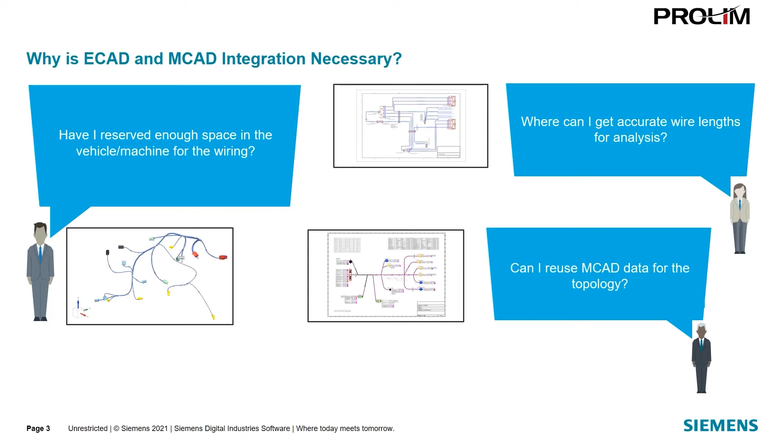The electrical designers need to ensure the correct circuit behavior, which requires voltage drop analysis and fuse sizing calculations, that is dependent on real-world wire lengths. How can these wire lengths be obtained? The harness designer needs to reproduce the 3D harness topology in 2D and combine it with the electrical data. If the 2D harness is just a derivative of the 3D harness, why should it need to be recreated from scratch? With the MCAD integration supported by VeSys, we address these challenges.

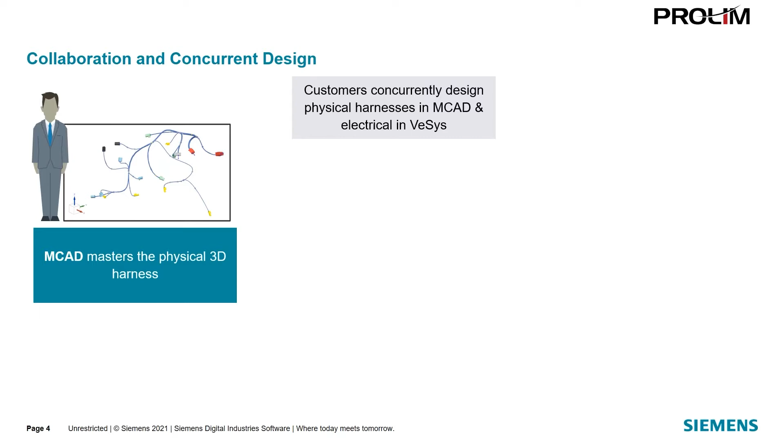A design flow incorporating VeSys supports collaboration and concurrent design. Customers are able to design physical harnesses in their MCAD tool of choice, while the electrical and harness designs are done within VeSys. The mechanical designer defines the harness geometry and fixtures, along with reserving space in the vehicle or machine. The electrical designer, using VeSys Design, masters the electrical content for the system, creating the needed wiring diagrams and conducting analysis.

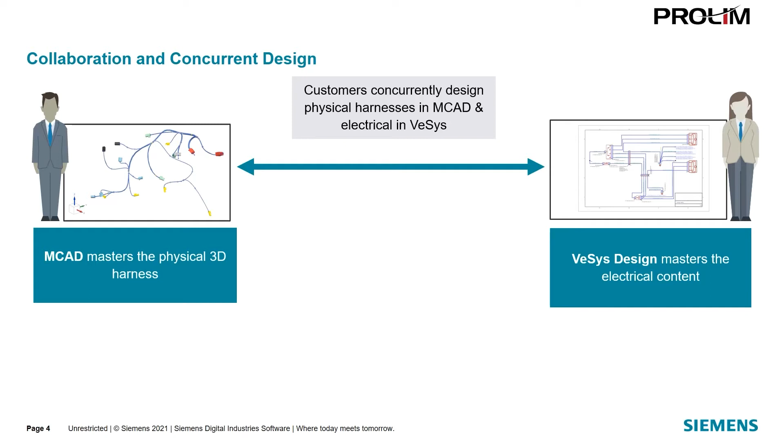Here, the mechanical and electrical disciplines can work independent of each other, but can easily pass data back and forth as it becomes available. The harness designer, using VeSys Harness, combines the MCAD and electrical data to fully define the electromechanical harness product. These interactions enhance the visibility between the ECAD and MCAD domains, supporting the co-design of mechatronic products. Having a better understanding of the impact electrical and mechanical specific decisions may have on the other domain is critical to the overall design quality.

In addition, the data exchange supported by VeSys eliminates the need to manually transfer data between the tools, saving considerable design time and potential for manually induced errors. We will be going more in-depth on these exchanges during the demo. All of the integration capabilities are enabled via a combination of our bridges framework and adapters, which handle the exchange of information between MCAD tools and VeSys, and our plugins, which are developed using the MCAD application's APIs and deployed within the MCAD products. In return, this ensures a seamless integration of the data between the tools.

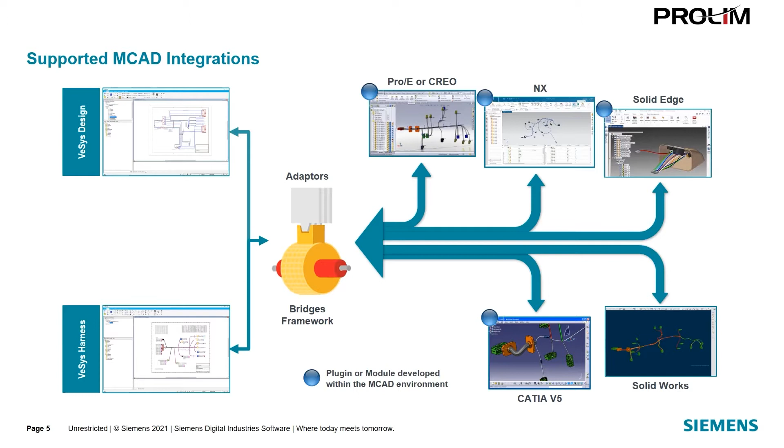VeSys supports integration with Creo, NX, Solid Edge, SolidWorks, and CATIA V5. VeSys and SolidWorks can exchange files natively, while plugins are available for the other MCAD solutions to manage the import of VeSys data. The Siemens tools, NX and Solid Edge, support a unique capability called Connected Mode. The NX and Solid Edge Connected Mode data exchange enables real-time data import and export, as well as cross-highlighting for ease of use and analysis during wiring and harness design.

The functionality automatically switches between wiring mode and harness mode exchange as needed within the same application. Any selected objects in NX or Solid Edge will be cross-highlighted in your diagram, and vice versa. For example, selecting a wire in VeSys will cross-highlight the corresponding shortest route path and the devices in NX that the wire connects to. Available objects include connectors, devices, wire bundles, splices, wires, multicores, clips, grommets, and so on. For the following demo, we will be utilizing Connected Mode to handle the exchange of data between VeSys and NX.

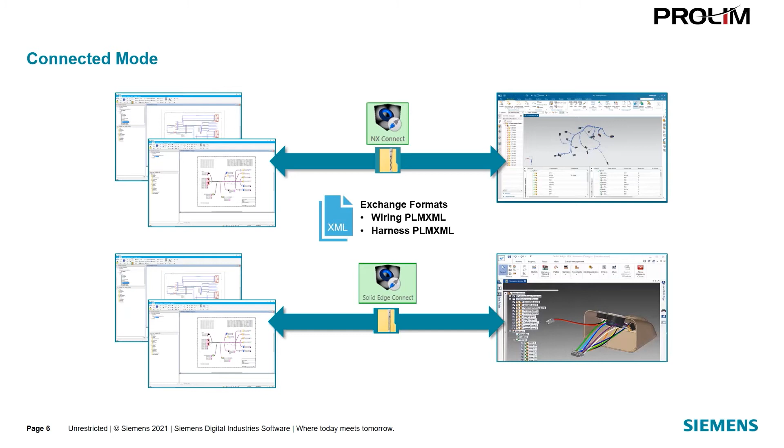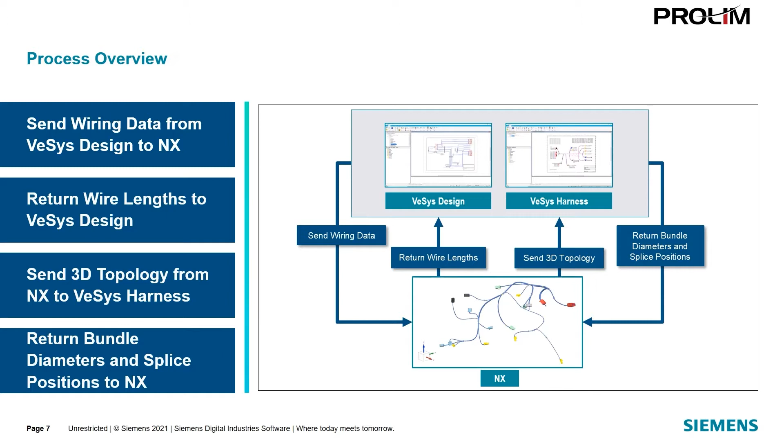Now we will be covering the various ways in which VeSys can integrate with an MCAD design. For this specific demo, we will be using NX for our MCAD environment, and will cover the bidirectional transfer of data between VeSys Design, VeSys Harness, and NX. In the first half of the demo, we will focus on the exchange between our wiring data in VeSys Design and physical harness data in NX. The wiring information from VeSys will be bridged out to NX as a wiring PLM XML file, utilizing connected mode. Once the data has been exported to NX, connectors will be auto-assigned and wires will be auto-routed.

Here we have the MCAD design open in NX and wiring design open in VeSys. As can be seen in the electrical connection and electrical component navigator of NX, there is no electrical content, only the bundles and connectors that have been added by the mechanical designer. Connected mode is established between both tools with the push of a button, enabling the real-time import and export of the wiring PLM XML file. The bridge filter allows us to select which harness designs we are exporting to. In this case, we will be using the single driver side door design.

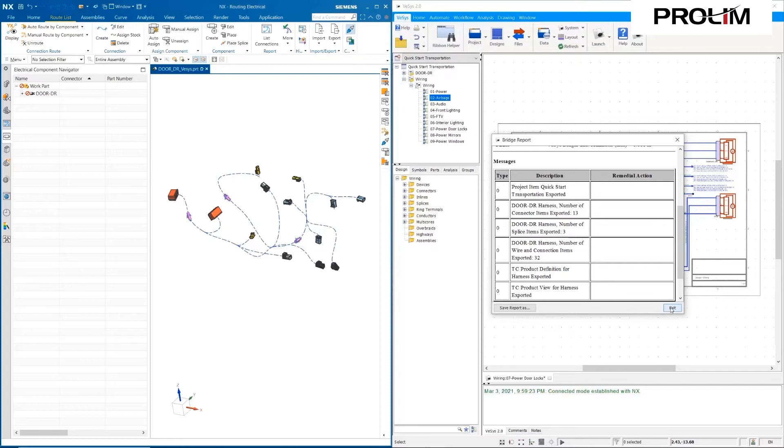The report indicates the number of connectors, splices, and wires passed to NX. The electrical component and electrical connection navigators are now populated with the data from VeSys. We will auto-assign connectors by part number, but it's possible to make the assignment based on any attribute. We will then manually assign any remaining components, in this case, the 3 splices.

Then, finally, we will also auto-route our wires at the component level. We successfully passed the electrical data from VeSys to NX with the push of a button, facilitated by connected mode. The mechanical designer had all the necessary data required to auto-assign connector part numbers as well as auto-route wires.

This saves the mechanical designer a considerable amount of time, avoiding the error-prone task of doing it manually, and also helps ensure the connectivity is an accurate representation of our VeSys-created wiring diagram. Now that the wires have been routed in NX, they have accurate lengths according to the physical routing. This is valuable information for electrical designers who can utilize it to conduct additional analysis and further verify electrical behavior.

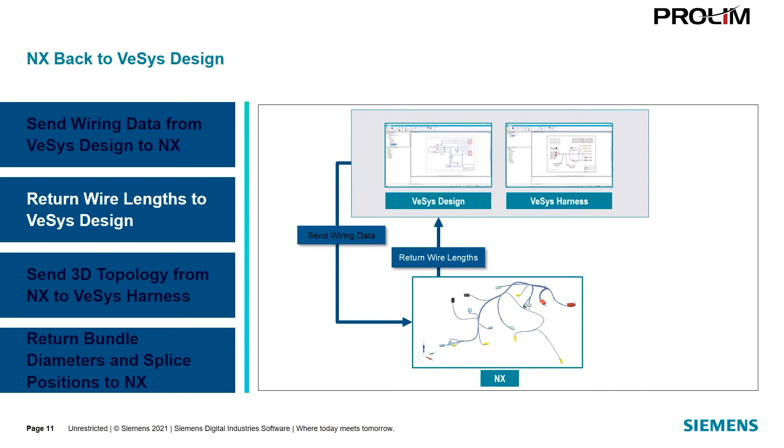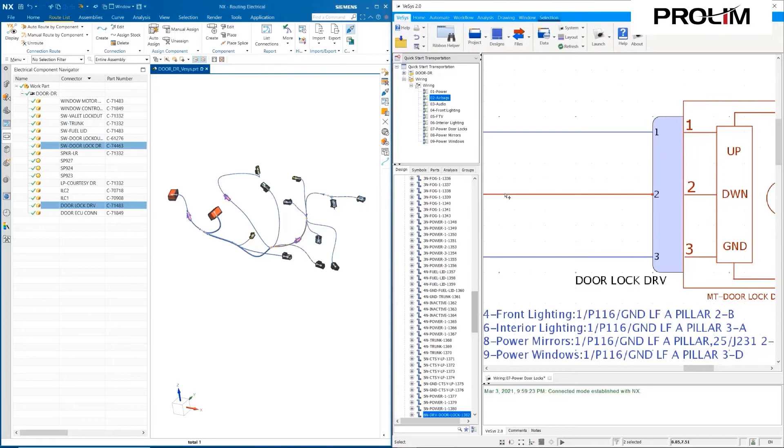This time, we will pass data from NX to VeSys and also highlight the cross-probing functionality offered by connected mode. With the wires fully routed in NX, they now have 3-dimensional lengths. We will navigate to a wire in VeSys and take note of the cross-probing functionality as we do this. Reviewing the properties for wire 6N1382, there currently is no wire length defined. Finding the same wire in NX, it can be seen that it has a length of 952 after routing.

Since we have already established connected mode, we simply need to import from NX. As with the export, an import bridge report is provided to indicate what has been brought in. Returning to wire 6N1382, it has been updated with its routed length from NX. This will allow the electrical designer to perform more accurate voltage drop analysis and fuse sizing calculations within VeSys.

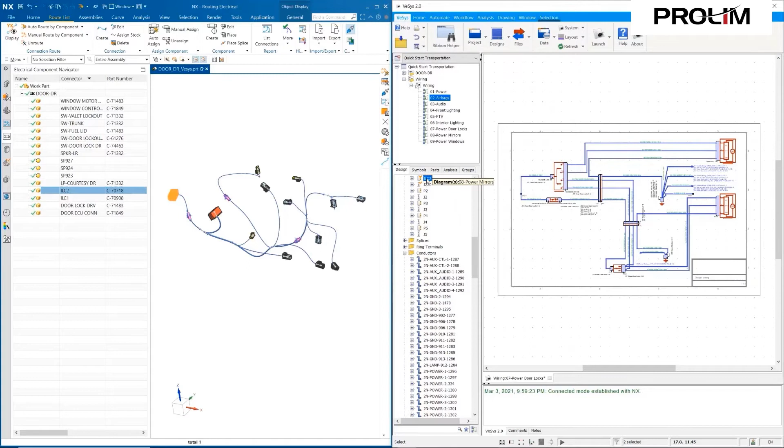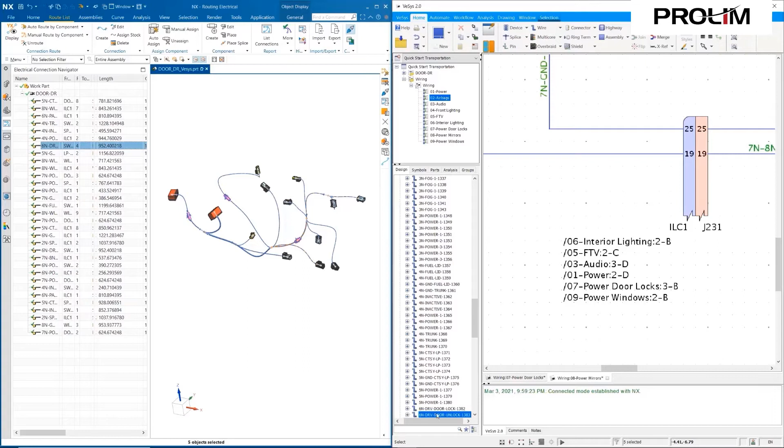To further verify everything has come over correctly, we can use the cross-probing again. Individual objects, such as a connector, can be selected to highlight it in both tools. With a connector selected, the electrical connection navigator will highlight all related connectivity, providing a visual indication of how they are wired. Individual wires can also be selected to identify how they will traverse the harness in the context of the larger parent assembly.

We pass the wire length information back to VeSys so the electrical engineer can verify the electrical design. We also made use of the cross-probing functionality to ensure the transfer of data was successful and provide a better understanding of the relationship between the electrical and mechanical designs.

Wire lengths are necessary for important verification steps, including voltage drop analysis and fuse sizing calculations. Being able to analyze these in VeSys can help the electrical engineer to catch and fix potential issues early before they are propagated downstream, possibly even to production, where the costs in terms of time and money can be exponentially greater.

For the second half of the demo, we will move on to the integrations between the 2D harness design in VeSys harness and physical harness in NX. We will start by importing the 3D topology from NX via the harness PLM XML file and flattening it to produce the 2D harness in VeSys. Then we will synchronize the electrical data from our wiring design in VeSys with the 2D harness.

We have NX and VeSys open and will once again establish connected mode, this time to exchange the harness PLM XML file. A quick thing to note, there are no wires present in the incoming data from NX. Routing wires in NX is an optional step for harness integration. Since VeSys Design owns the electrical content and can synchronize with VeSys harness, it is dependent on how you want your flow to operate to determine if wires need to be present in NX before importing to VeSys harness. In this use case, only the 3D topology without wires will be brought over.

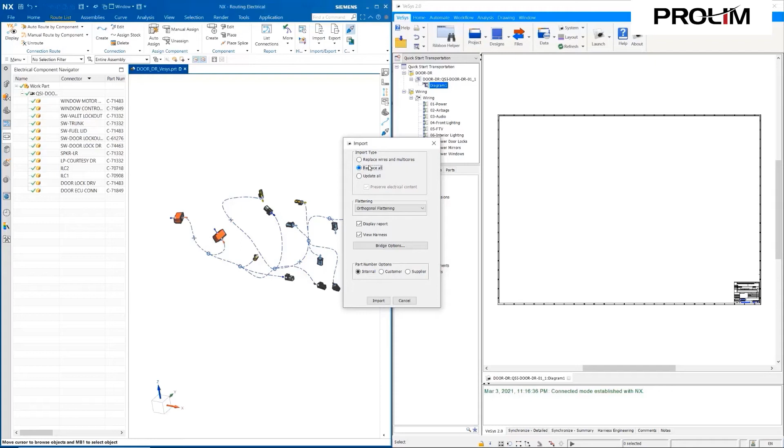When importing, a number of options are available. First, the type of import can be selected either to update the harness in VeSys with the option to preserve electrical content, replace all content, or only replace wires and multicores. Bridge options provide further control. The Import tab allows you to center and scale the harness as well as define margins to fit your desired border.

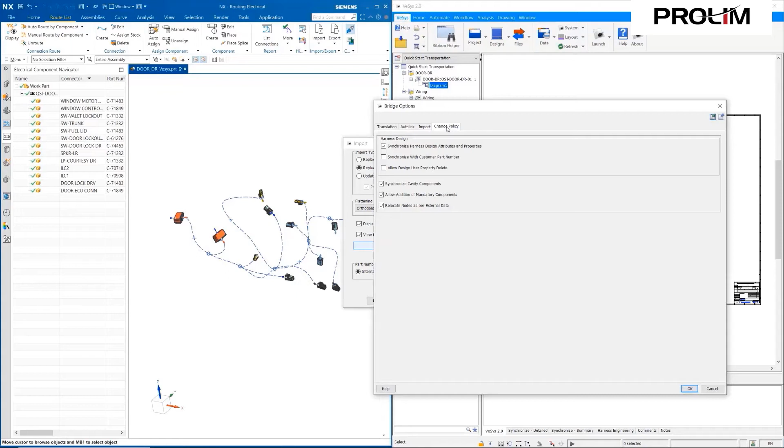The Auto Link tab controls how matches are made between external and internal harness data. The Translation tab controls both the translation of part numbers and codes, which influences how component data is updated during bridge operations. The Change Policy tab accounts for how differences are handled when bridging in harness data. The Harness View dialog provides a preview displaying the incoming 3D topology data and presents the flattening transformation options that can be applied before processing into the harness design.

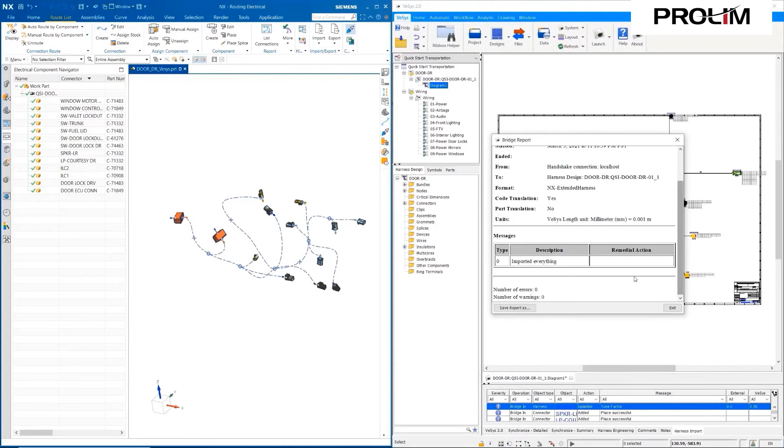The appropriate face views have been assigned for the connectors based on part number. Since the NX data did not include routed wires, we still need to synchronize with our VeSys wiring design.

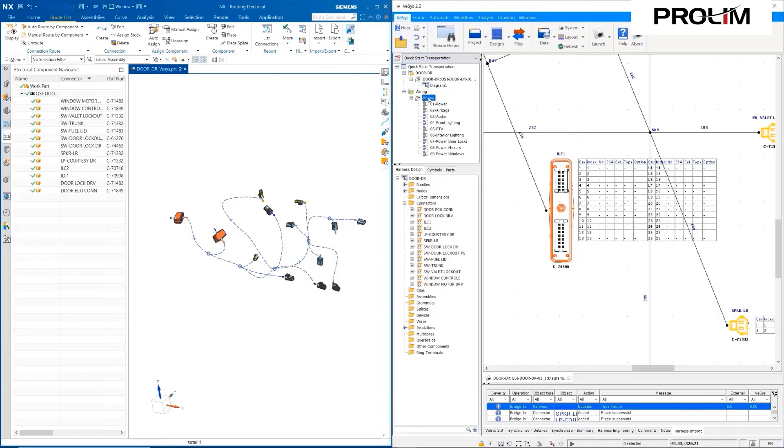Harness synchronization is done to get electrical data from the VeSys design passed into one or more harness designs, either to add electrical data to an existing bundle configuration or as the basis for a new harness design. Wires and splices are populated in the harness design, and splices will need to be placed accordingly, which will be our next step.

In this use case, the harness designer received the full 3D topology of the physical harness without wires, and synchronized the 2D harness with the electrical data from our wiring diagram. Again, this is an instance where manual work is replaced by automation that enables correct by construction design. Bringing in the harness topology from our MCAD environment and electrical from the ECAD environment guarantees our harness design has all the necessary data from both sources.

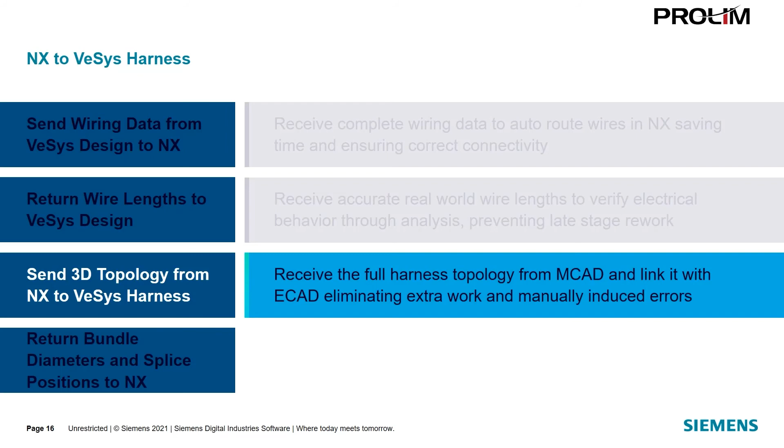For the final step, we will place the splices in VeSys and use automation to calculate the bundle diameters. This data will then be returned to NX. We will also make some modifications to the splices within NX and return them to VeSys to briefly highlight that data exchange as well.

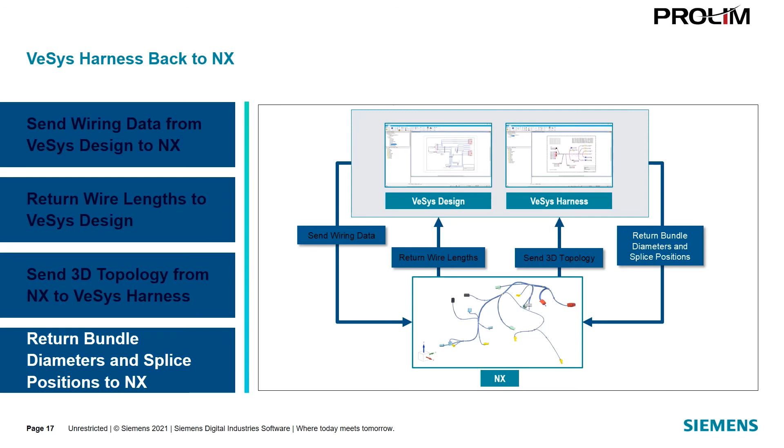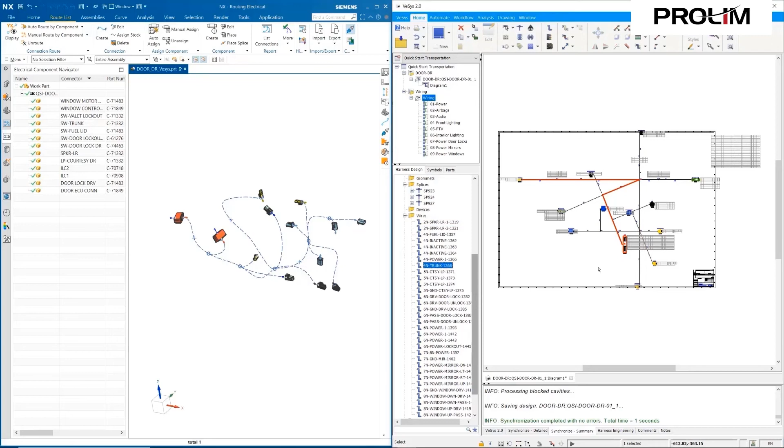Picking up where we left off previously, the splices imported from our VeSys wiring design need to be placed on the harness. This is simplified by the node position utility, which allows you to precisely control its placement relative to other objects on the harness. Examining the properties of our bundles, they don't have bundle diameters defined yet. We can make use of automation to calculate the bundle sizes utilizing our wire library definitions.

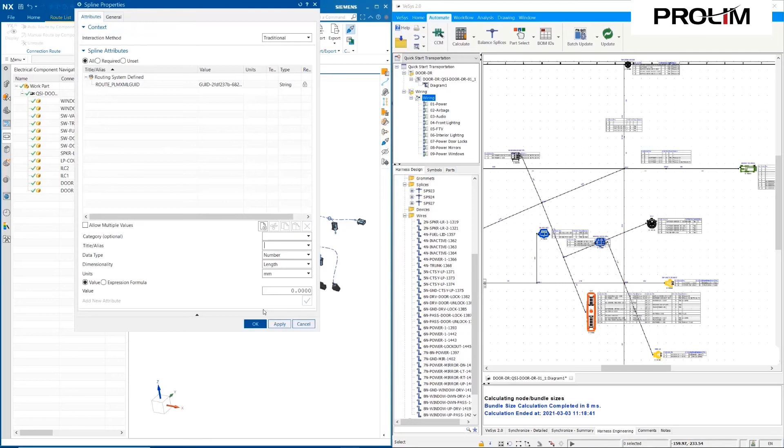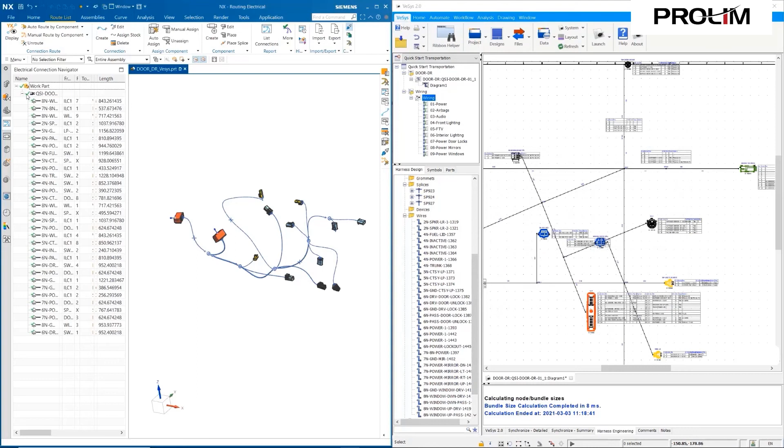Now we are ready to pass back our updates to NX. To create bundle solids in NX based on VeSys data, create bundles during route list import needs to be enabled. Following the export, bundle solids have been computed using diameter data directly from VeSys, and wires are added to the electrical connection navigator.

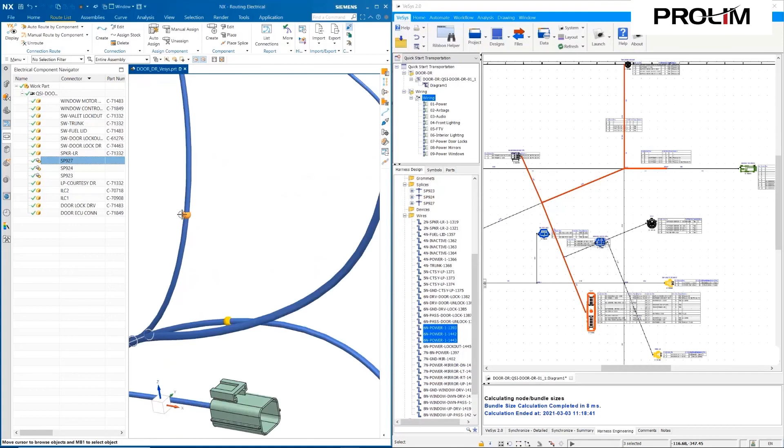The bundle, or in this case of NX, stock, diameters are populated and the splices are placed automatically based on their locations in VeSys. Again, cross-probing helps verify the data came over correctly. It is also possible for the mechanical designer to make modifications to the splice positioning that can then be sent back to VeSys.

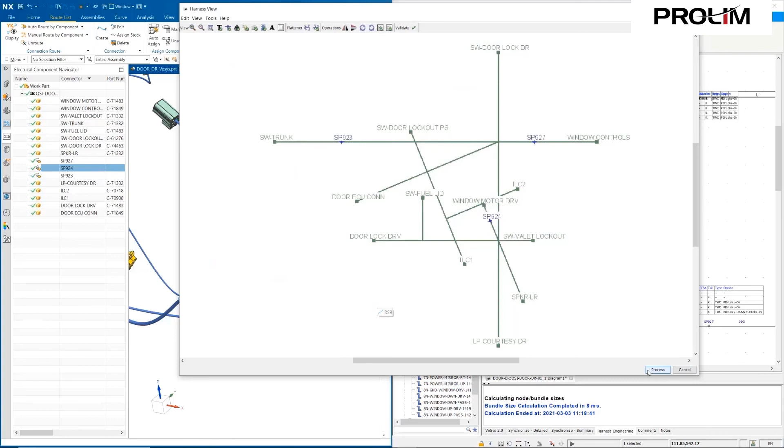Preserve electrical content will be used during Bridge In, so all the ECAD data in the existing design is added to or updated, but not deleted. The splice has been moved to its new position.

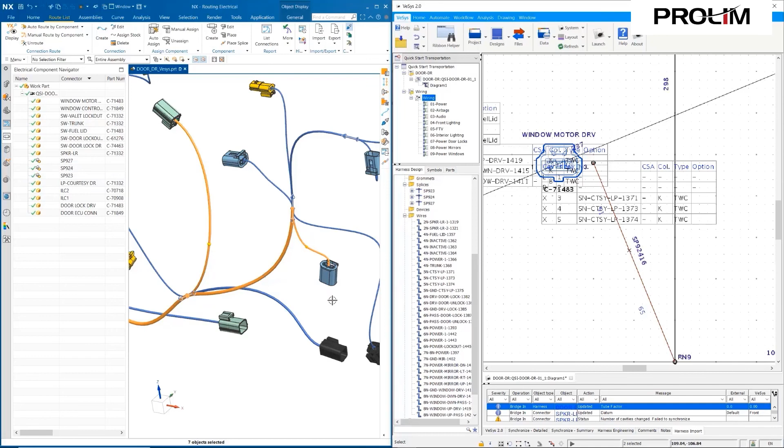The mechanical engineer now has accurate bundle diameters and splice positions to work with. They can proceed with interference studies to determine if the harness will successfully fit within the target application's enclosure. If updates need to be made to the 3D harness, the changes can be easily passed back to VeSys to update the design.

Through the course of this demonstration, we have explored the various integrations between VeSys and NX, exchanging both wiring and harness data. The underlying advantages provided by ECAD MCAD integration can be found throughout the flow, reducing errors, speeding up design time, and enhancing collaboration between both domains.

In closing, I would like to return to the question we started with. Why is ECAD and MCAD integration necessary? It is this type of integration that supports the development of mechatronic products that are growing in both demand and complexity. The increased visibility between domains is critical for cross-functional design teams to maximize efficiency.

The automation and the handling of this data exchange gives designers more time to focus on validating their designs and innovation, both of which improve overall design quality. With both electrical and mechanical portions of the design being of equal importance, fully understanding both aspects will in the end result in a better product.